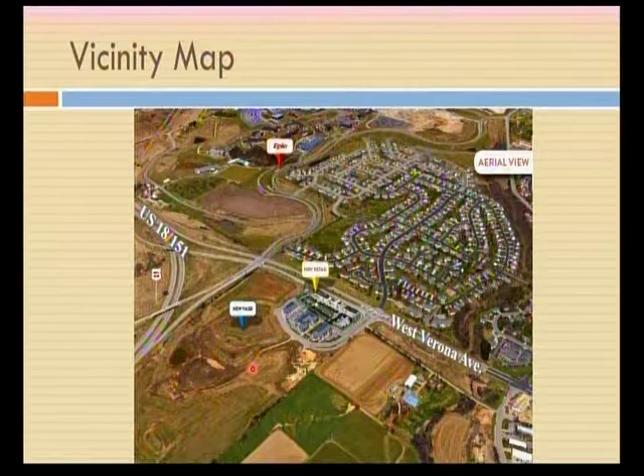At that time, Steve Brown Apartments was looking at a 29-unit apartment building, 8 townhouses, and 15,200 square feet of commercial space. The applicant did not go forward with those plans and has made revisions. The plans now are for a strictly straight retail development.

There would be 3 buildings fronting along West Verona Avenue here, and a secondary building just south of those. For reference, the 3 apartment buildings are just off the screen to the south of Stephen Way.

The buildings themselves would require setback exemptions as part of the plan development process. They're looking at buildings with approximately a 0 setback along West Verona Avenue. Staff has no concerns with those; these are setback exemptions we've talked about before in previous plan development projects, consistent with past conversations with the applicant and past projects in this area.

One exemption they'll need is for the drive-through. There is a drive-through planned for building C4, located between the road of West End Circle and the building itself. This property is within the downtown overlay district, which requires that no drive-through be located between the building and the street. Staff is comfortable with this drive-through location, feeling that requirement is more applicable to West Verona Avenue. Since this one would be between the building and West End Circle, staff would be comfortable with an exemption in this location.

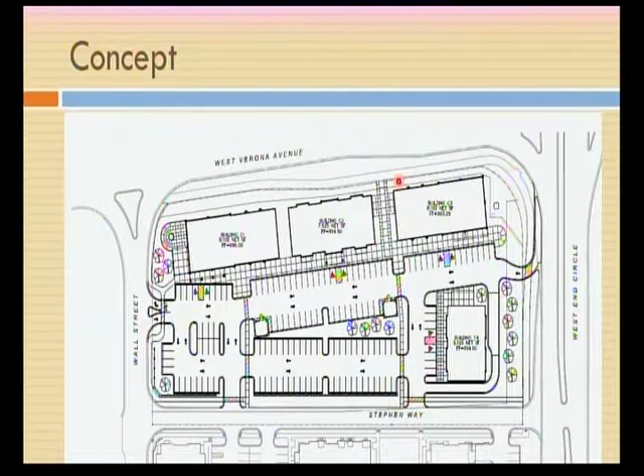On the screen before you, I think it's a 10-foot wide bike and ped path that's out there, but you can kind of see the line right there—that's the bike and ped path. The one you're on top of right now, correct. So strictly setback from the path, you're probably looking at, just eyeballing here, 10 feet. So you'll be close, but you won't be on top of it. Great, all right, thank you.

I'm going to make a few comments myself. As Alder Gaskell noted, I think the circulation for people walking is really good. As someone who's walked along a ton of strip mall parking lots, it would be nice if more parking lots were designed that way. I like the way the trees look on the drawing, and I hope that's an accurate reflection of the landscaping and not just something that looks nice. Part of my cynicism, but you know how some of these concept designs go. Understood.

They're not going to be that big right away, to begin with, but there's a lot of good spacing, and trees can help in a small way with stormwater stuff as well. I think also, to reflect Alder Gaskell's comments, I also get a lot of complaints and concerns about stormwater and runoff flooding people's yards, which isn't necessarily unique to this project, but I think it's something we want to keep in mind.

As far as the shared parking, I think that's great, and it seems like more than an adequate amount of parking there. As far as the sign exemptions go, I would personally be fine with them. I think we want this to be a destination, and I think you need a little bit better signage if it's going to be a destination location. So I'd be more than fine with that.

Any other questions or comments from the commission? Commissioner Tucker Long: one other thought with the trees. I also like the placement of the trees, and I like that there's a lot of them here. One thing you might consider is having some more evergreen trees to keep the greenness throughout the whole year, not just summer.

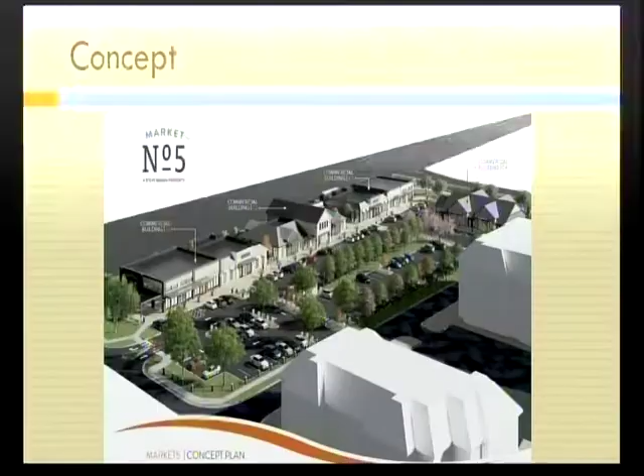All right, do you feel like you have everything you need? I think I'm good. All right, appreciate the feedback. Thank you. Council will be discussing this at our next meeting.

Next up, we have item 5, a discussion and possible action on the initial site plan review for a proposed 5,112 square foot UW Credit Union to be located at 651 Hometown Circle. Thank you—Andy, if you could put the PowerPoint back up. This is the initial review for the UW Credit Union's proposed building at 651 Hometown Circle.

This is the former location of Dairy Queen on East Verona Avenue. This project requires site plan approval from the Planning Commission and also requires a conditional use permit from the city for the drive-through use.

The building itself would front along East Verona Avenue, set back 15 feet, which conforms to the downtown overlay design district requirements of a minimum 15 foot and maximum 25 foot setback. It also requires a minimum building height of 20 feet, and the proposed building will be 20 feet to meet that requirement. They'll have 3 drive-through lanes, as shown on the site plan.

They're having 29 parking spaces; the 35 on the plan is mislabeled. As part of this, they would also close the shared access point with Taco Bell. The reason for closing that is just because of the drive-through configuration—it wouldn't create a safe situation in this location.

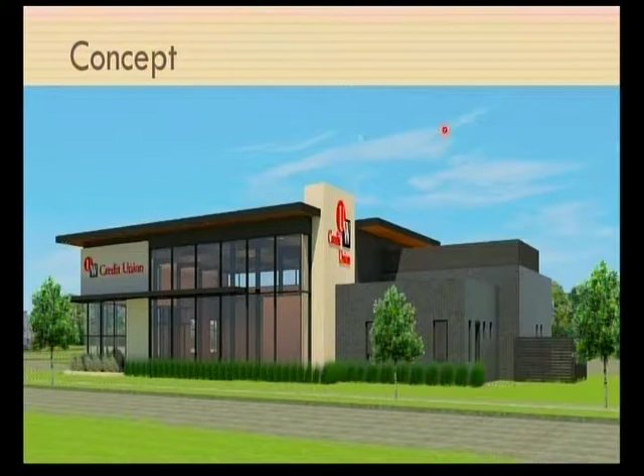The applicant is proposing to use high-quality materials for the building, a mixture of stone, brick, and metal. There are a couple elevations in your packet, one of which is on the screen before you. It would include a significant amount of glass along East Verona Avenue, providing a unique looking building that will complement other buildings in the city.

One thing to point out is the applicant intends to use the existing monument sign that was allowed for Dairy Queen. As part of the final approvals, the applicant will come in with some general renderings of what that will look like. So with that, staff recommends the Plan Commission review the submitted materials and provide feedback to the applicant. The applicant is here tonight and would be happy to answer any questions.

Thank you for the explanation. Questions, comments from the commission?

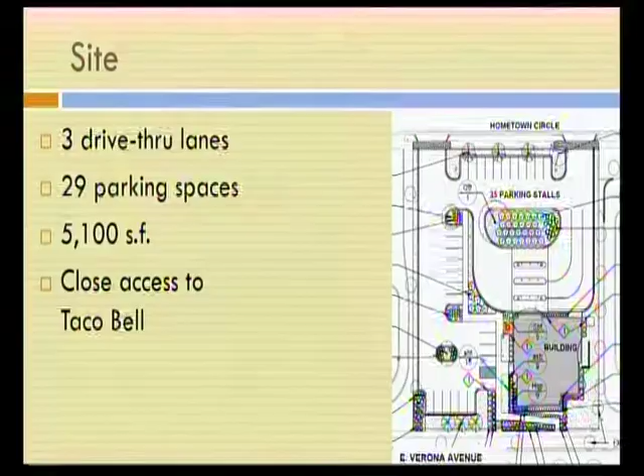Great, any other comments? All right, with that, it will be on the next council agenda. Oh, it will not - okay, my apologies, it will not, getting ahead of myself. All right, with that, we'll move on to the next item.

Item 6, discussion and possible action regarding an initial review for a proposed subdivision to create 21 single-family lots and a parcel for the future Public Works facility, to be located west of Range Trail and north of East Chapel Royal Drive.

Thank you, Andy, if you could turn the screen on for me. So this is the initial review for the Purple Cow property. The Purple Cow property is located along Range Trail, highlighted in yellow on the screen before you. Actually, it's this property in red here, this site here. And the rest of the yellow property is land currently owned by Veridian Homes.

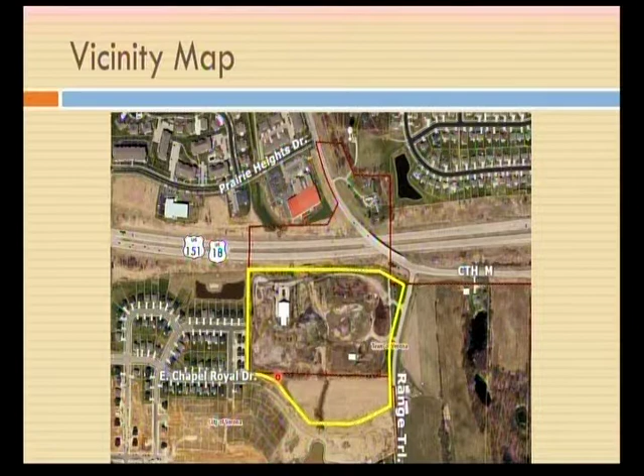The applicant is requesting an initial review of the project to get feedback on the proposed concept for the single-family portion of the site, and also feedback on the potential future public works facility to be located on the property. The development requires many approvals, including annexation, rezoning, a road vacation, site plan approval, preliminary plat, final plat, CSM - so it takes the full gamut of city approvals. But we want to take this forward just for the initial concept prior to getting into the details.

So the plan submitted in the packet is for the 21 single-family homes and also the future public works facility. The single-family homes are in the orange color on the screen before you. It would be a mix of neighborhood residential lots and community residential lots - those final configurations will be resolved as the project moves forward.

The site is currently partly located in the town. The portions located within the Cathedral Point subdivision are zoned neighborhood residential in this location here, and then this site over here is actually zoned urban residential, which is our multifamily zoning district. So as part of this, they'd be zoning the properties when brought into the city, and then the multifamily designation would be rezoned to a single-family designation.

As part of this, the applicant would be constructing a cul-de-sac from Steeple Point, which would become a cul-de-sac here. It currently stops at the Purple Cow property.

It would then be cul-de-saced, and there would be a new road constructed off of East Chapel Royal Drive to serve the single-family lots in that area. As part of this, the blue property would be owned by the city for a future public works facility. So there's two pieces: the Veridian piece, which is the single-family piece shown in orange, and the blue, which would be the city portion. It's a joint project between the developer and the city.

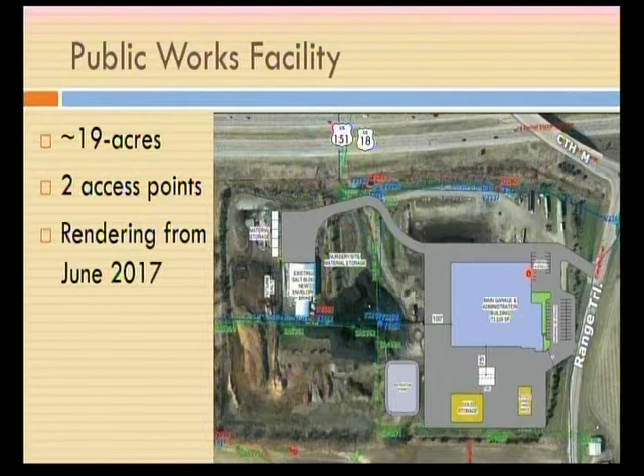Tentatively, the city is targeting with the developer to purchase the lands at the end of 2018. The applicant for the single-family home portion is hoping to potentially start construction for those lots, or at least grading for some of the utilities, at the end of 2018. The timing of the Public Works facility will obviously be dependent upon council authorization and the budgeting cycle, but I believe the target could be 2021, 2022, 2023, someplace in there, for the initial timeline of that project.

So with that, I'd be happy to answer any questions. This is just the initial review. Most likely when this comes back, you'll have a CSM before you. The CSM needs to be created to separate the city's lot in this location from the lots from the Purple Cow that the developer is acquiring. Immediately after that, on the same agenda, we'll probably have a preliminary plat and also a final plat that would actually create the single family lots. We'll also potentially have a rezoning, and as part of that the council will be looking at annexation and developers agreements as well.

We also have Theron Jacobson, our Director of Public Works, here, who'd be happy to answer any questions. And we also have representatives from Veridian here as well, who'd be happy to answer any questions you have. Thank you for that explanation. Questions, comments from the commission? Commissioner Tucker Long, and then Commissioner Heinzen.

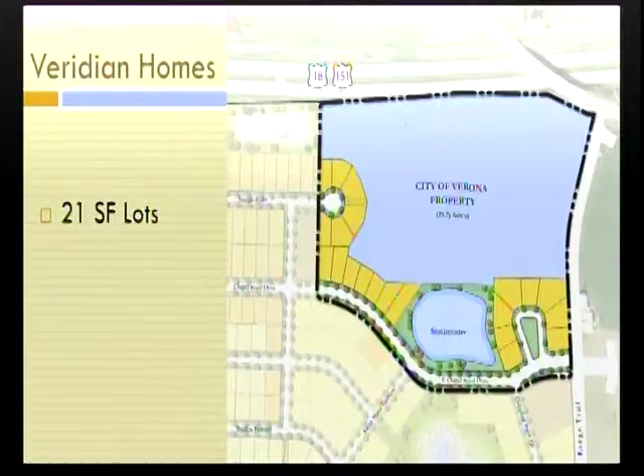All right, and with that we will move on to item 7, a discussion regarding zoning ordinance amendments. Mr. Sayre: Sure, there's two items on the agenda. First one's talking about setbacks. Next one's talking about timing of the comprehensive plan update and a zoning ordinance update. Andy, if you could turn the screen on for me.

So this is intended tonight - we're gonna go through kind of initially just the conversation about setbacks. Want to have an initial conversation here with the Plan Commission, get your feedback, get your thoughts as we work on this. So I'm gonna briefly go through a presentation here. If you have any questions or comments, just stop me on the slide that we're at.

But generally, this is what we look at, this is what developers look at. No different than many other municipalities as well.

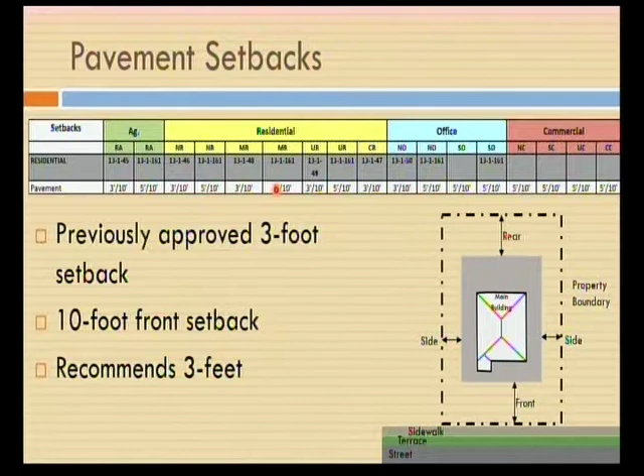For residential areas, there is a 3-foot side yard setback and rear yard setback, and a 10-foot front yard setback. I don't know if anybody has any comments or concerns about that. If not, I'll just keep moving through these.

So getting into the actual structure itself - when you look at a property, you have the street in front of you. This is one of those diagrams we talked about. You have the terrace, the green area between the sidewalk and street. We have the sidewalk, and then typically about a foot behind the sidewalk is where your property line actually starts, and that's where you start measuring the setback from.

So the front setback, when we talk about that, is the front of the house, the front that faces the road. The sides are the sides of the house, and the rear is opposite the front. Typically the rear yard setback requirement in the city is 25 feet.

Within the city, generally we're finding rear setbacks from 25 to 40 feet, just on average. Other municipalities, as we did some research in the area, have setbacks ranging from 20 to 25 feet. I think if the Plan Commission desired to make any changes, you could potentially take the rear yard setback from 15 to 20 feet. Typically the rear is what's more valuable to most people from a use standpoint.

Typically, that's where you find your sheds or your play structures or places of activity, more than your front yard. But there could be the potential, if the Plan Commission directed staff, we could potentially make some changes to reduce that rear yard setback.

I think from a staff standpoint, we're indifferent. I think if you're going to probably leave a setback the same as it is now, it'd probably be the rear one, just because that's where you get more of the play and activity.

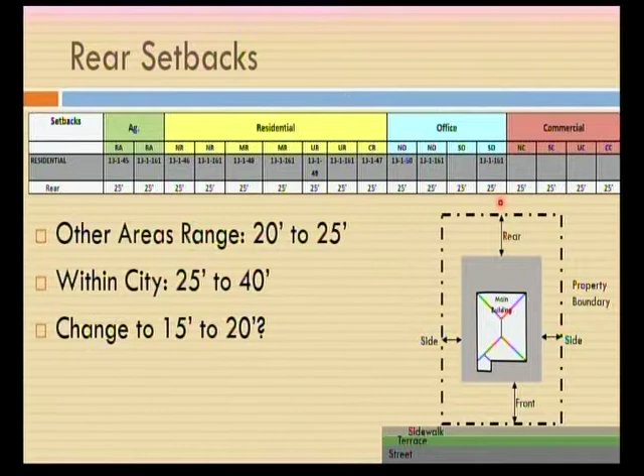The one thing with the setbacks as well, it's as you look at that rear yard, typically they vary through yards. You can look down the back of a house, the back of a property line, and it's going to vary depending on how deep each property is, and between the two properties you may have 50, 60, 70 feet. So you do potentially get those larger yards that people could gather in and use, but sometimes you just get fences along the back lot lines too.

So I guess initially here, let's talk about the rear yard setbacks. Is there any feelings to modifying that from the existing 25-foot setback to looking at something smaller?

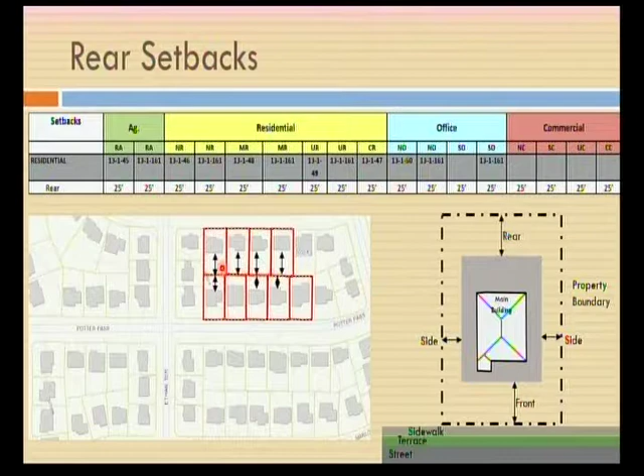I just want to clarify one thing quick. We're talking about requirements. So if we specified, let's say, a 15-foot minimum requirement, that means if a developer wanted to, they could do 25, 30, depending on what they think the market wants. Correct, so this is just the minimum setback that we require. That's a good question in the ordinance.

Commissioner Heinzen: Sure, I guess I'll start with this, Adam. Has anyone, to your knowledge, been troubled by the setback being too great as it is right now? That might be one of the reasons why we should look at this, because people have come to the city and been unhappy with 25 feet. For the rear, no, I have not heard any issues with the rear yard setback.

Commissioner: I guess with respect to all the setbacks, and I'll start with the rear, my default would be to not change anything unless there is a very specific and good reason why we should. It could be because we know people have come to the city about the front or the side—I can imagine side setbacks are troublesome at times. Or if in conversations with other communities we know that has been a problem, or setbacks are too great in some other places, we want to get ahead of the curve in what could otherwise be a problem. But just to change it for changing's sake without a good reason, at least at the moment, I'd think it's not necessary.

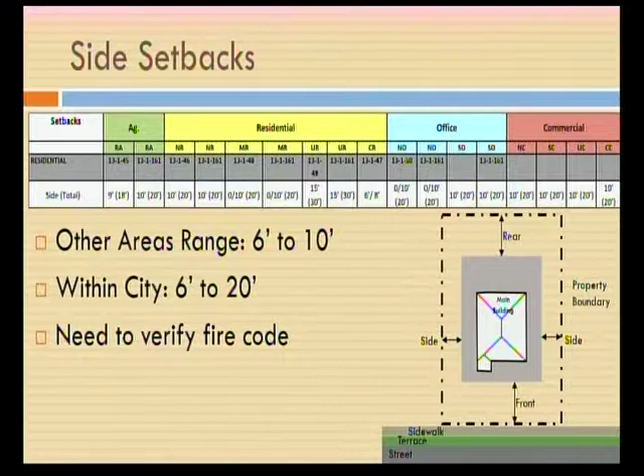Side yard setbacks, right now within the city, we have setbacks that range from 6 to 20 feet. The 6 feet is the minimum of the CR district, and then sometimes just by people going above and beyond what's required, which is typically a 10-foot setback in the NR district, you sometimes get these larger setbacks. And one thing to Mr. Manley's point also about the fire codes, that's one thing that obviously if you start making changes to the side yard setback, you run into the issue with fires as well.

This is actually Katherine's house, so this is just an example of looking at the distance when we talk about 20 feet. This is 18.4 feet between these two houses. This is approximately 7 feet from the corner over to that house, and this is close to what you typically find in the NR district in the city right now.

Obviously it looks like she's also got some flower beds there and the air conditioner on this one as well, but I think from a side yard setback standpoint, I don't know how much you could change. I think if you're already at 6 and 8 in your CR and 10 in the NR, there's really not much you'd want to change there. They're probably pretty close to where they need to be, but we haven't talked to the fire department about this yet. We wanted to at least get feedback from the plan commission, but over the years we haven't heard too much in comments regarding that setback, just because that's not really a driving factor in most situations.

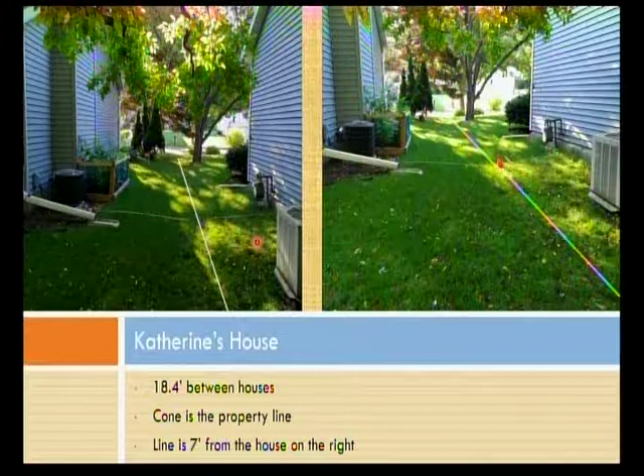I think going to the one we have heard feedback on in the past, this is the front yard setback. This is the one we typically have heard from developers on, looking at exemptions to reduce that front yard setback and wanting the city to be more creative with this as well.

So in the city right now, it's a 25 foot front yard setback. Other municipalities range from 20 to 25 feet. Some municipalities also allow encroachments into the setback for front porches.

One comment I'll make is, if you're looking at changing the front yard setback, you need to make sure the garage stays at 25 feet. The reason for that is if you put the garage at 20, typically a parking stall is about 18 feet, and it gets very close to hanging over the sidewalk. So the garage needs to stay at 25 feet regardless, otherwise you'll get cars that actually hang over the sidewalk, creating a public safety issue.

Looking at some examples of changes, this is Kentlands in Maryland, and we have some local examples as well. There is a 10-foot setback for the actual structure itself, and the porches are allowed to encroach into that setback, so you get more of a street-type presence.

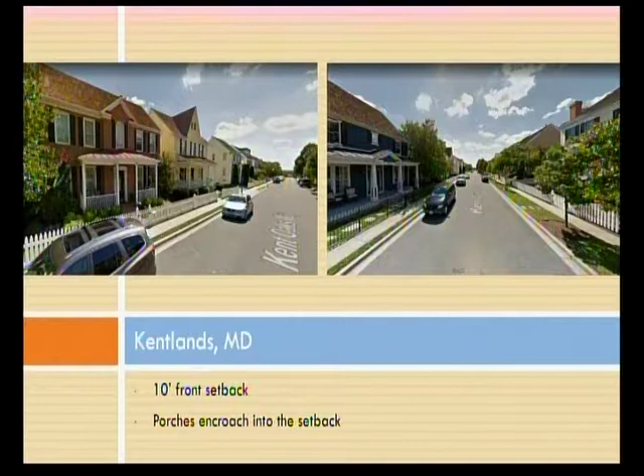So moving on to the next section here. As we've looked at the code, we wanted to have the conversation with the Plan Commission as well. We know we need to make some modifications to our signage regulations.

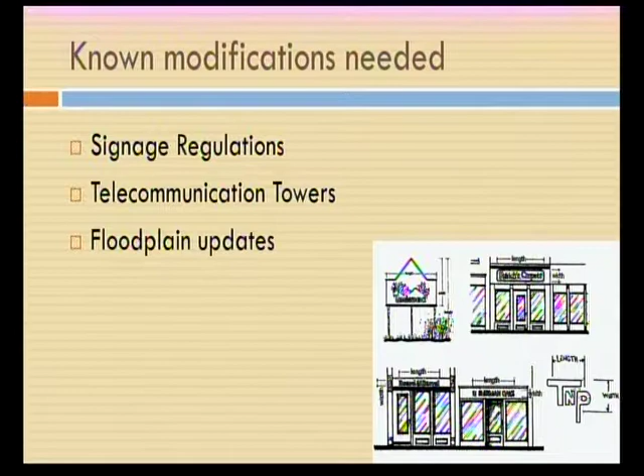That's based upon a Supreme Court ruling. The whole signage section needs to be redone because of that ruling. Telecommunication towers, cell towers, because of changes in state law, we have to make changes to that as well. The whole thing needs to be redone. And then we need additional floodplain updates as well.

We've also talked over the years about parking maximums. We've talked about potential chickens in the city, that's being talked about again. Fencing requirements as well are being discussed. Landscaping requirements, drive-through standards, setbacks, which you're talking about tonight. Density, and then the housing study from CARPC, which will hopefully be coming soon, potentially incorporating anything from that as well.

So we've got a lot of potential updates coming for the zoning code, and on top of that, we have a comprehensive plan that needs to be updated as well. The comprehensive plan should be updated in 10 years, we're coming up to that. We should start working on that in 2019. Staff is looking for feedback from the Plan Commission on where you want to put our priorities, because ultimately we can't do all this at once just because of average workload and everything else we do.

But one of the thoughts that we had regarding the comprehensive plan was actually Katherine's idea, and I thought it was a great idea: potentially looking at trying to reaffirm that for a few years and not doing anything with it, and trying to get that updated once the 2020 census comes out. Right now we're not on that cycle, so we're working off ACS data, which is American Community Survey data, which has a larger margin of error.

Potentially looking at just delaying that and working on the zoning code instead for next year—probably the whole thing. But delaying the comprehensive plan until the census data comes out, and then updating it with the latest data, may be a better approach so we can get better data and get on the right schedule for the next 10 years going forward. That was one of our thoughts.

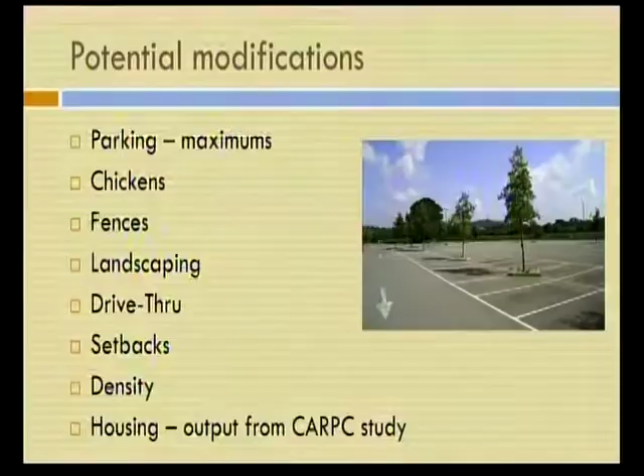Next item on the agenda was updates from the planning department. At your station there's a sheet briefly updating the plan commission on what's going on in the city. The Lincoln Street Apartments have been to the plan commission a few times and will go to the common council on July 23rd for a reconsideration request from 3 alders regarding the 90 apartment units. Legacy at Knoll Manor, the 32 unit memory care facility, is under construction. Kettle Creek North is starting phase 2 of their project in the western part of that plat. And Bach Racecraft got their approvals today. Happy to answer any questions.

Sugar Creek Commons changes are going to the August PC meeting. Asked if there's any idea what the changes look like, the response was there will obviously be changes, though the revisions haven't been seen yet. Most likely there will be additional units in the project, and possibly an additional story to the buildings, increasing height. So additional housing units, correct. That's tentatively planned for the August meeting.